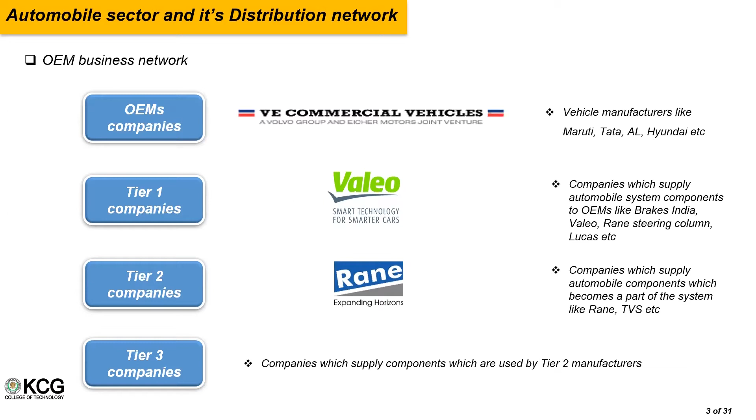As we progress, you'll understand using an example. Say there is an OEM, which is Honda, which makes the car and sells it to us. And there is a tier 1 called Brakes India Private Limited, which is a TVS group company. They supply this brake system as a whole, with the caliper, the disc, and all those things, to the OEMs. So RANE Brake Lining is a company which produces a friction product, which is a brake pad, to Brakes India, which is a tier 1.

And then RANE Brake Lining again buys a component from a tier 3 company, which is a back plate, which is one of the components to make the brake pad as such. So once it is made and it goes out, this is the cycle of supply chain through which the automobile industry functions.

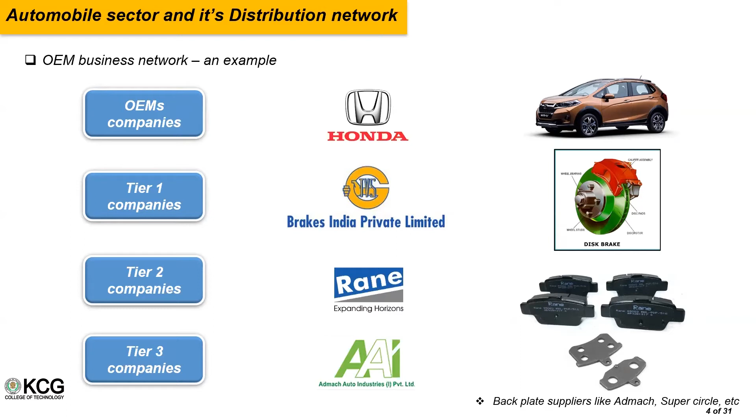Why I would like to talk about this distribution network is because when we are studying, our exposure towards the automobile industry will mostly pertain to OEMs like Honda, Hyundai, Ashok Leyland, Tata, Toyota, and so on, because we see those OEM manufacturers in advertisements and commercial ads. So that gets registered in our mind as saying these are all the automobile companies. But actually, if you see the industry as such, there are a lot of companies in automobile which supply components to these OEMs. Thereby, we have a lot of scope and requirements for mechanical engineering as such. So this is the reason I thought I would share this structure of OEMs and the distribution network.

So then, the vehicle has been manufactured. Now, how do the OEMs supply to the end customer? Say I want to buy a vehicle, so how do I get it from the OEMs? It is through a dealer.

There are dealers available all over India. Like in Chennai, you have X Mobiles. In the North, you have Power Mode Automobiles. These people are the ones who contact the OEMs directly, and then they buy the vehicle as such from the OEMs and supply it to the end customer. So this is how the OEMs reach the buyers.

And then there's also something called COCO, which means company operated, company owned dealership network. This is another medium through which the OEM sells their vehicle to the vehicle buyers.

And how do they reach us? As a vehicle buyer, certain people will buy with the money which they have. Certain people will go and contact the financiers, which means the bank, for loans. So when they contact the banks for loans, these financiers become key influencers in making the OEM sell the vehicle to the buyers. So this is how it is channeled and connected.

And also the fleet operators, in the sense the logistics and travel people who take us from one place to another, are another influencer for buying a vehicle through the vehicle OEMs. So this is how the vehicle OEMs sell vehicles to buyers through this structure.

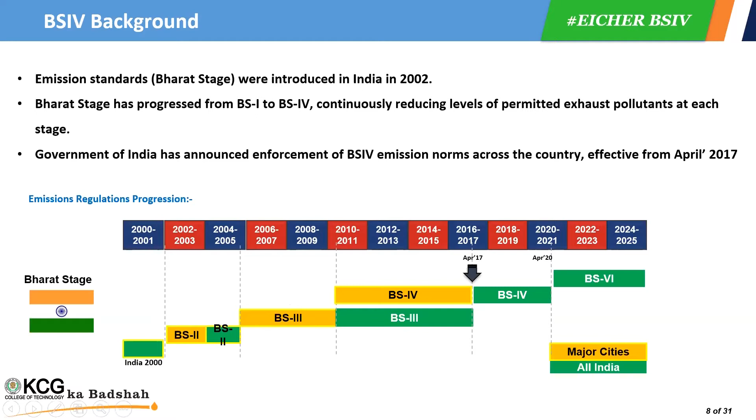So what is this BS6 and BS4 all about? As I was explaining before, you have these emissions from the vehicle which are unavoidable, but something which is in our control is to reduce the effect of these emissions. So how do we do it? It is basically through some components like EGR and SCR.

EGR and SCR you would have studied in your automobile chapter, where you have the exhaust gas recirculation system. It is a methodology through which the gases exhausting from the combustion are again taken back to the engine to make sure they get completely combusted, and then NOx, which is nitrogen oxides, gets lowered because of the temperature in the combustion chamber, and then it is released to the atmosphere. So this way the NOx amount is reduced.

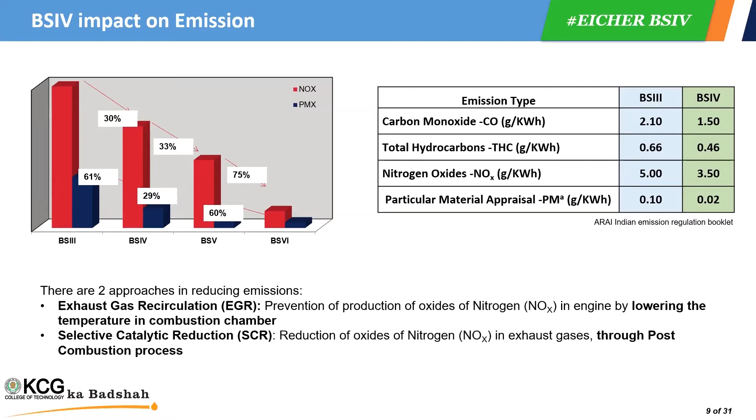Also, the selective catalytic reduction is one where you have a catalyst reacting to the exhaust system and reducing the emissions. Coming back to this slide, this is the basic functioning of exhaust gas recirculation. I'm not going into depth on it—our objective in this presentation is more about the process and how the automobile works. So this is just to give you an idea about how it is done.

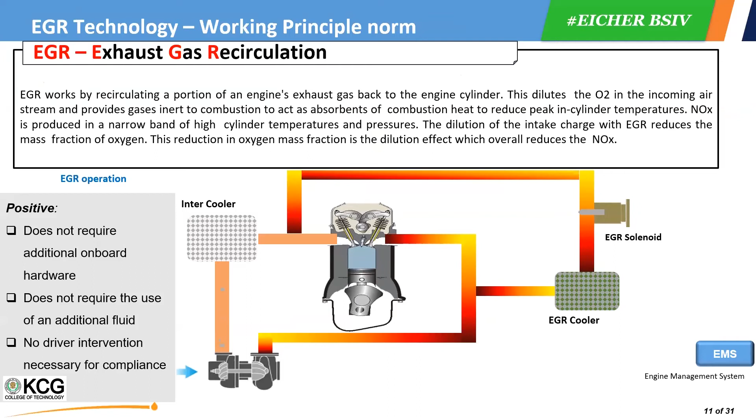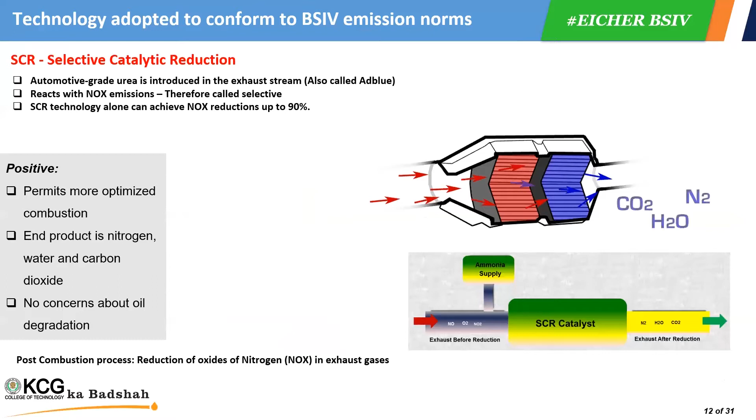So in a vehicle, if you have both EGR and SCR, it becomes a BS6 vehicle. So this is about the emission norms and how we are going to move to BS6. I'll move on to the next slide.

This is basically a slide from Volvo Eicher commercial vehicle. We all know there are two segments in the market: one is the passenger car vehicle segment. The other is the commercial vehicle segment. Passenger car segment is something which we use as vehicle owners, like for personal use and passenger movement. That is called passenger car, which includes Maruti, Hyundai, Honda, Toyota, and all those companies.

The other segment is the commercial vehicle. These are vehicles used for business purposes, like carrying goods from one place to another, such as trucks and buses, which are used for transportation and all those things. So this is called a commercial vehicle. How is this commercial vehicle segregated in the vehicle OEMs? They call it into three categories.

One category is the light commercial vehicle. Light commercial vehicles are categorized based on tonnage - any vehicle with a weight of less than 5 tons is considered a light commercial vehicle. Some examples are the Tata Ace and the Bolero pickup, vehicles you see in nearby areas carrying cylinders, eggs, water cans, and basic utilities like food, fruits and vegetables. These are the vehicles which run inside the city and are given permission to do so.

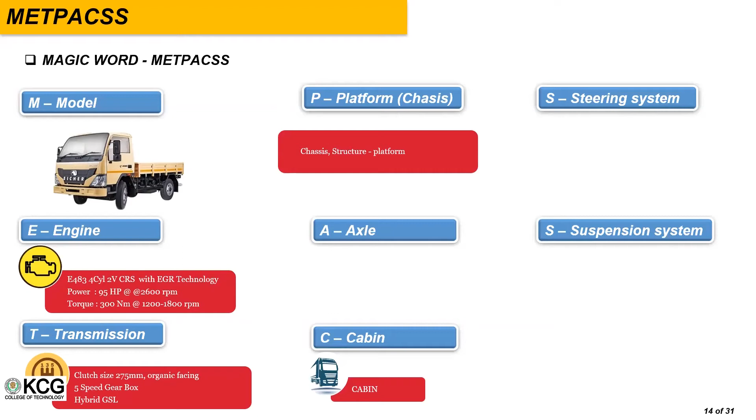So this is a sales technique which has been used in the OEMs to sell the product to the customer by explaining its features. So let's move on to the next slide.

So the major topic for us is total quality management. TQM, which you would have gone through in your subjects, is a system which helps us make sure that all our processes are maintained in perfect quality through the usage of some tools and techniques. So again, I'm going to give you another magic word, which is PDCA.

So you go for it, you see what all chapters we have, 5 chapters, and you plan when to study what. And then when you do it, while studying it, you also have a check mechanism, like am I going through at the pace which I need to for the examination.

So you check again whether you're going through. If you're not going through at that pace, you increase your pace, or you try to differentiate your methodology and then move forward at a much better pace. So that is the basic explanation of PDCA.

So if you see in an organization, everywhere this PDCA cycle is being circulated, and everywhere the system happens only through planning, and then we check it at regular intervals, and then we act accordingly based on the results we obtain. So this is basically TQM.

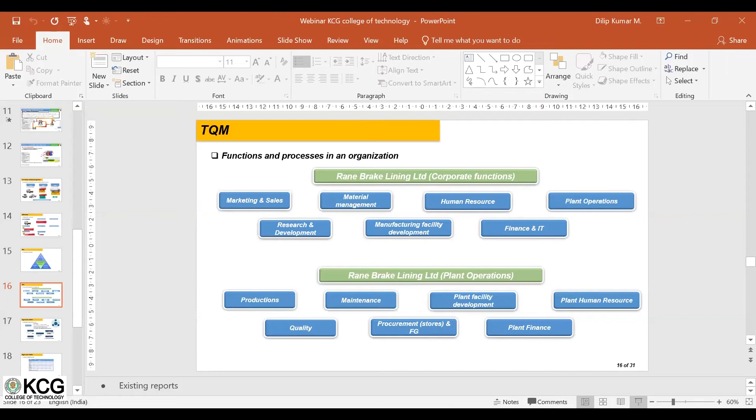Hello? Okay, so hello? Dilip, audience audio is muted. Okay, fine. Okay, sir, okay, okay, got it. So okay, oh sorry, okay. So no issues sir, no issues.

So this marketing and sales is actually two different terminologies which we used to talk about. Most of the cases, most of the people when they talk, they say marketing and sales are the same, but that's not the case. Marketing is different and sales is different.

How are they different? Marketing is the one which creates the demand. Say, as a vehicle buyer, I'm saying—say I'm a vehicle buyer, for me Hyundai considers me as a potential buyer. And how does he attract me and how does he create demand amongst me? He puts a lot of ads, banners, posters. I see the banners and advertisements, I get attracted towards the product, and then I go and buy a vehicle, which is a Honda Amaze or whatever.

So what does sales do now? Sales takes the marketing concepts and the selling points from the marketing department and explains to the customer the benefits of the product to make the customer buy it. So this is how the marketing and sales function merge together and sell a product. Every company will have a marketing and sales function.

Next is research and development. How do marketing and research and development interlink together? This is through marketing, as I said it creates a demand. One more critical process which marketing does is understand the customer needs—what does the customer expect out of a vehicle? Say you had a Swift some time before, and you have a lot of other Swifts coming up, like Dzire, like new Swift, and then the Santro facelift.

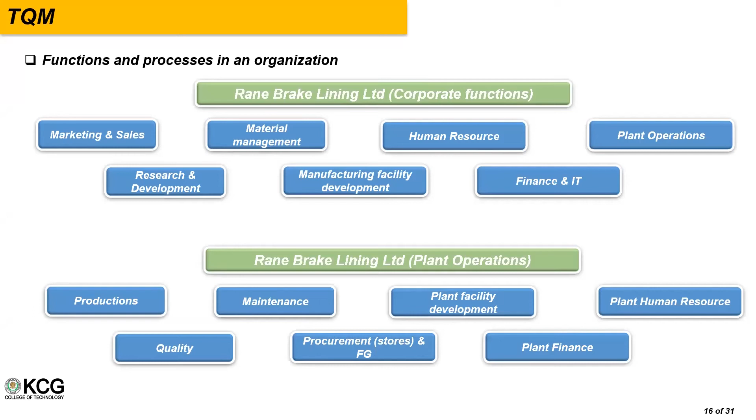S means supplier, I means input, P means process, O means outcome, and C means customer. This is a simple technique which helps you understand any process, whatever process you go through. It is a guide for you to ask questions in the right manner to understand about the particular process.

For example, I'll go through one of the processes of a marketing department. First, let's go through the basic functions of marketing. As I said before, one important function of marketing and sales is to create demand. Another important function is to reach customers and develop new business. And one of the most important is to understand customer needs and communicate them to the R&D department. Marketing also plays a key role in pricing, product launch, and positioning the product in the market, and it sells the product through promotion and customer relationship. So these are some of the major critical functions of a marketing department.

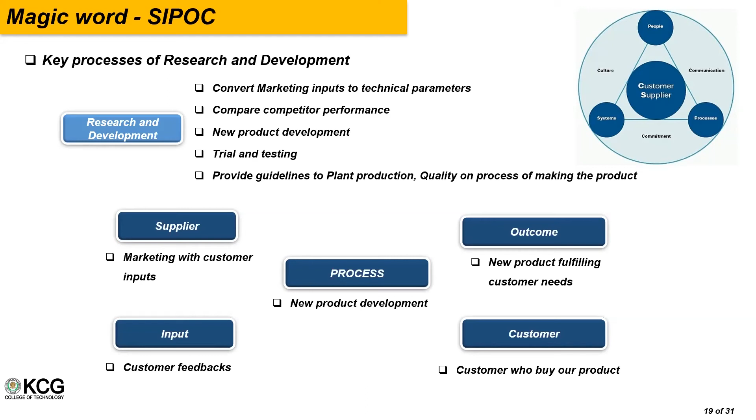So I'll just run you through quickly what are all the departments there are and their basic functions, which I already covered, but as a summary I'll take you through. Material management system, as I said, plans the raw material demand, and then procures material to make sure it reaches the customer in the right quantity and right time, manages the supply chain, stores the product, and maintains the FG. FG means finished goods. Once a product is produced, the inventory is made, and that is maintained in the organization to make sure the products reach the customer at the right time, and also does a very important job of localizing and cost saving.

So for a material management department, it is very essential to select the right supplier. I would like to explain this with an example. When we try to buy a phone, we compare a lot of other phones. We see which is of very good quality, less cost, at the same time giving very good performance. We do this basic analysis when we buy any product - TV, washing machine, computer, whatever. The same way, the material management department does an analysis for every raw material it procures from a supplier.

It sources who all the suppliers are, and what are the benefits from the supplier, whether he can produce and give the product without any interruption for our production, whether it's of good quality, and importantly the price, which matches with other suppliers. All this analysis is done, and then the products are procured.

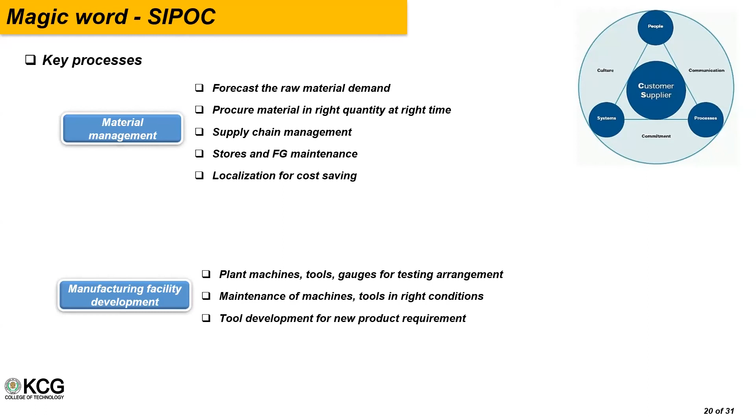Next is finance and IT, which I explained before. Finance basically takes care of the SAP process. I would like to explain SAP in detail. SAP is a concept used in enterprise resource planning.

You would go through SAP in one of your chapters, like production planning and control. So what does it basically do? It makes sure the material movement of the company is entered into a system and followed through that system and process, making it accountable for the company to audit later. Whenever material is procured from the materials department, it is entered in SAP.

So there are two movements happening in the organization. One is the physical movement of material from one function to the other - from raw material to production, production to quality, quality to customer, and customer to the final end user. This process also happens simultaneously in the system as an instruction through the computer. This is called SAP, enterprise resource planning.

This gives every department information on when to procure material, whether the product has reached the quality department for testing, whether it has reached the production department for producing, or whether it has reached the finished goods department. Likewise, it gives a very good flow and makes sure every process is accountable in the organization.